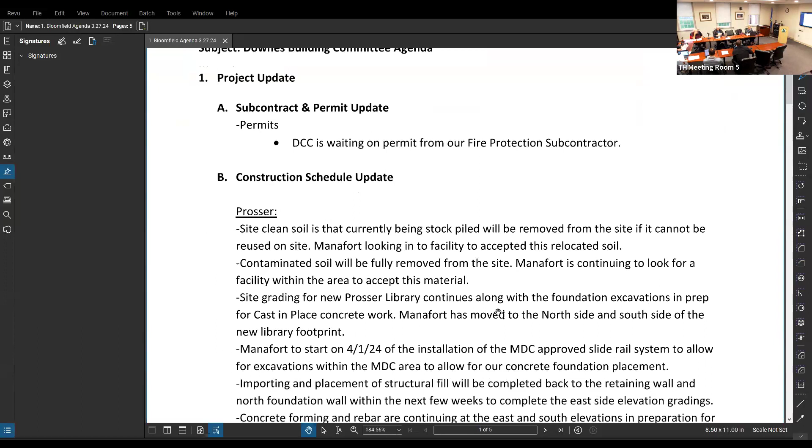Item 1B, construction schedule update. We're going to talk about the site clean soil that is currently being stockpiled. Manafort is looking into a facility to drop this off, and again, they're going to remove it from the site. Any disposal facility, knowing it's clean product, should be able to accept this.

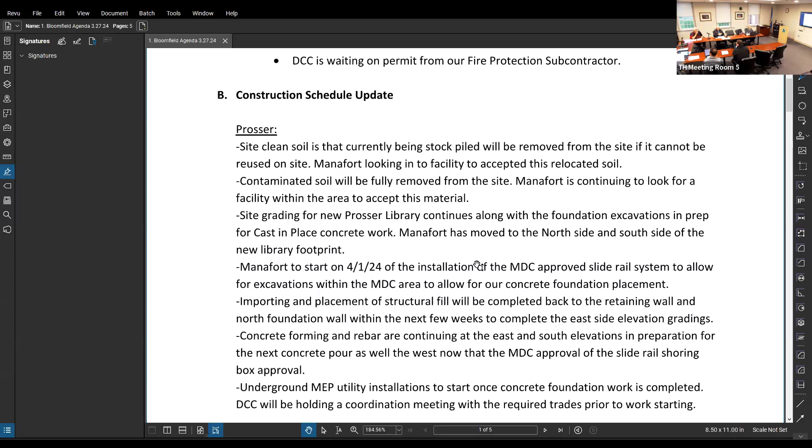The contaminated soil on the Prosser side of things is covered right now, behind the Jersey barriers. Manafort is still trying to find a disposal facility within the area to drop that off. We've requested them to reach out to Manchester landfill. Manchester takes this type of soil, but they're only allowed 2 loads a day, so you need to be scheduled, fighting for a 2-spot position with anybody else trying to bring contaminated soil in. So Manafort's working diligently to find an accepted facility to take this product.

Site grading is continuing along for the foundation excavations in preparation for the cast-in-place work. Manafort has moved to the north side and south side of the new library footprint, and they continue to excavate and provide the path for our concrete subcontractor. On a big note, Manafort is going to start work on April 1st with the installation of the MDC-approved slide rail system, which will allow us to excavate in 80-foot sections for that west side footing, which will be the edge of the new parking garage.

With that being said, Manafort's going to excavate about 80 feet within this custom trench box, and right behind that, we are going to start forming, placing rebar, and pouring concrete. Once we're done with that and the concrete settles, we'll be able to start forming rebar and placement of concrete for the wall. So in 80-foot sections, you're going to have footing and wall installed before we could finish the back end of that elevation, which would be another about 60 feet from that 80.

So it was big news from the MDC that they approved this shoring design. It allows us to work within a small encroachment of the MDC encroachment area, but it also gives them the comfort of knowing that their 24-inch RCP line buried underground will be supported, which was big news. We've been dealing with that for the past, I would say, 6 weeks.

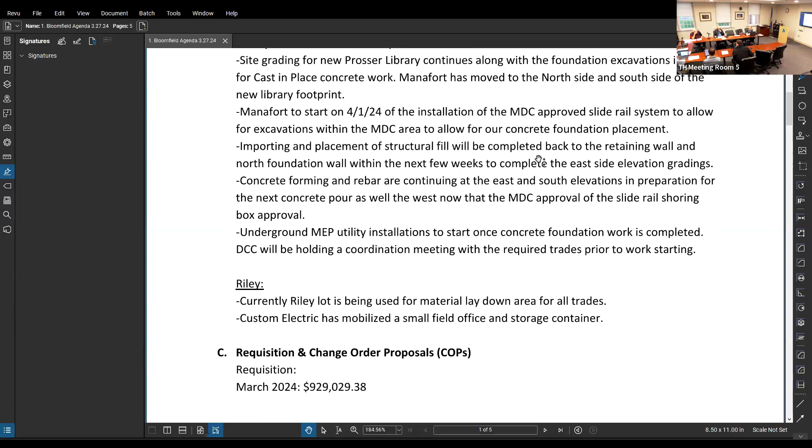So we finally took that under control, and MDC gave us a blessing to move forward, which is fantastic news. Concrete forming and rebar continuing on the east and south elevations in preparation for the next concrete pour, which will be scheduled next week. And again, that west elevation is going to start as well with Manafort in that custom trench box they're going to be providing us. Underground MEP utility installations will start once the concrete foundation work is in place.

We plan on having a coordination meeting with the responsible trade contractors to talk about the underground work that needs to happen, along with Manafort, who will own the trenching for those utilities. Currently, Riley is still being used as a material laydown area. Custom Electric has mobilized a small field office and storage container on that site.

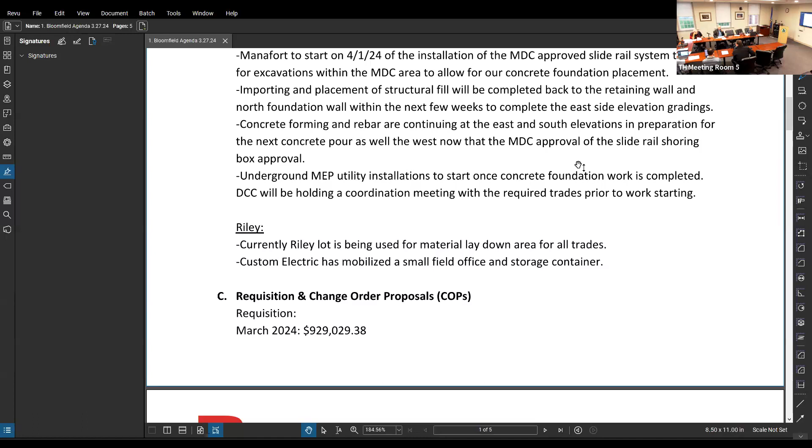Any subcontractors that are coming on or need access to that Riley side are going to be coordinated with Jason if they want to drop off a storage container, equipment, or some type of field office at that point in time. Moving on, item 1C here is the requisitions and change order proposals section, as always.

We are looking for approval for March 2024 in the amount of $929,029.38. Okay, stop and look at that. Can you put that up on the screen? The requisition? Yeah, I think I should be able to. I just have to get into my email. That's probably the best way to do it.

We have questions on the requisition while we're waiting. Wait till it's up to see if anybody else has questions. I don't know if everybody can see it. So this is application number 9, covers basically all of March. So when we submit these requisitions, we usually get our subcontractor requisitions around the 20th each month. From that point on, they are trying to forecast where they're going to be by the end of the month.

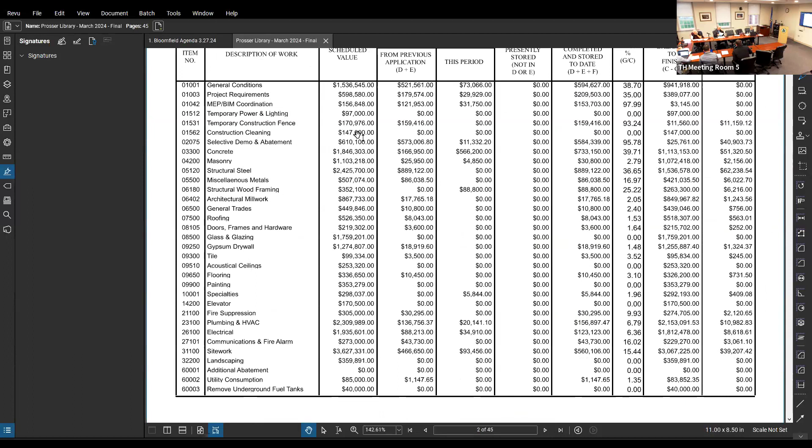So if you look here, we have all our schedule values, which is based off of our GMP, our approved contract with the town of Bloomfield. Each one of these items here in column C, you'll see a scheduled value will be revised accordingly based on approved change orders to date, which will reflect a difference from the original GMP number that was in there.

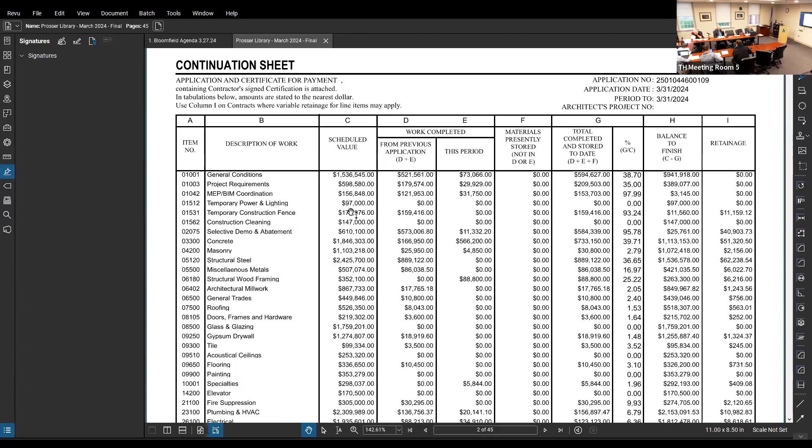And in our monthly reports, you could follow that tracking by our budget report, which is updated and current with the most recent figures. It also has approved costs for change orders as well as any pending, and it will show you a final potential sum for that line item for that subcontractor.

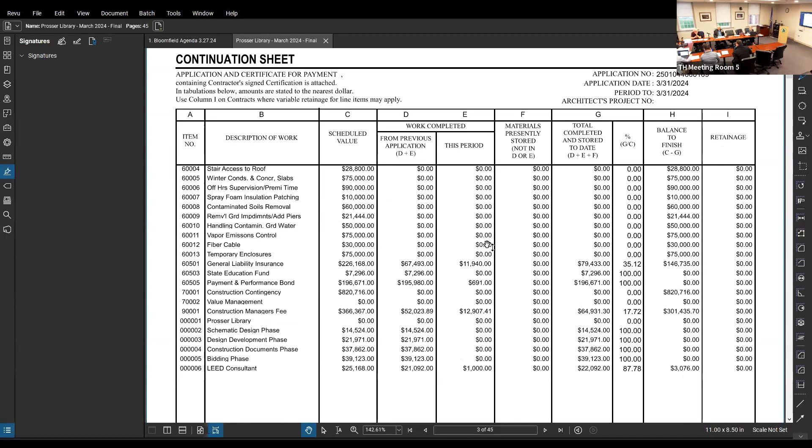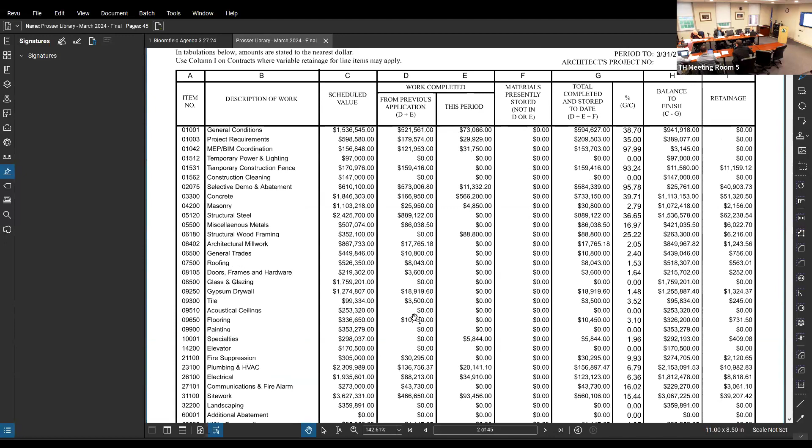All right. I know typically this has gone through the hands of our project rep, Sean, and through the architect's hands as well for approval with any questions. But despite that, I still had a question. Yeah, go ahead. Just the structural wood framing. Yep. Is now being billed up to 25%. Yes. That is for material. $34,000 was for the shop drawing process, which I remember we were requiring a breakout to try to get them moving because Epifano dropped their bid.

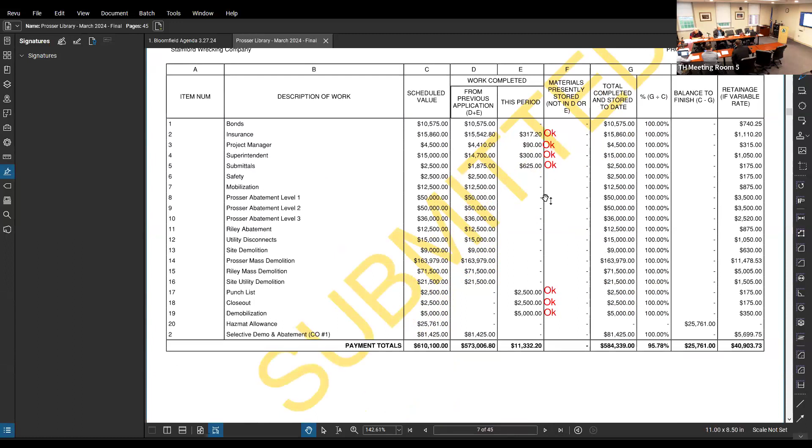So let me actually scroll down. Mark, I'll touch upon that once I hit their requisition, what they're billing. Right now, you could see all the subcontractor specific breakdowns in detail. What I usually do is go through each one line by line. If I'm okay with their billing, I'll write okay, and if not, I'll make a note. They'll revise their requisitions to what percentage I feel and Sean feels and TSKP feels they need to be. So for instance, we're scrolling down.

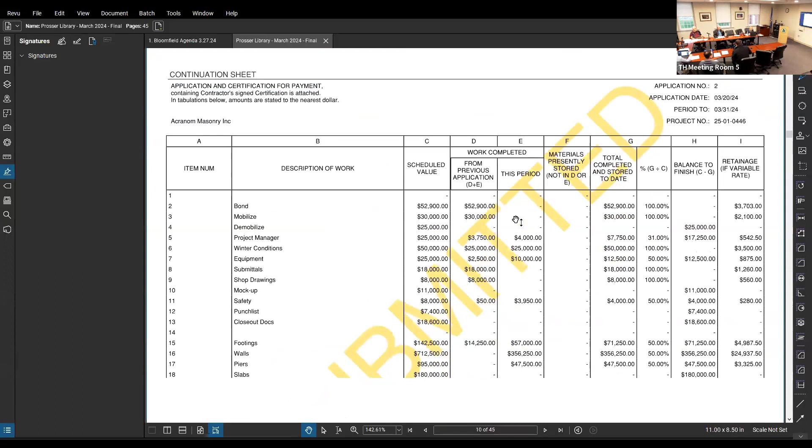Acranom is our concrete subcontractor. Originally, their first submission had their footings billed at 100%. They're not even close. They're 50%. They were billing 80% of their walls. Again, they're only 50% through. So that's some of the items that we catch and that we vet. Yeah, I know. This was the only item that I saw. So let's go down to South County Post and Beam.

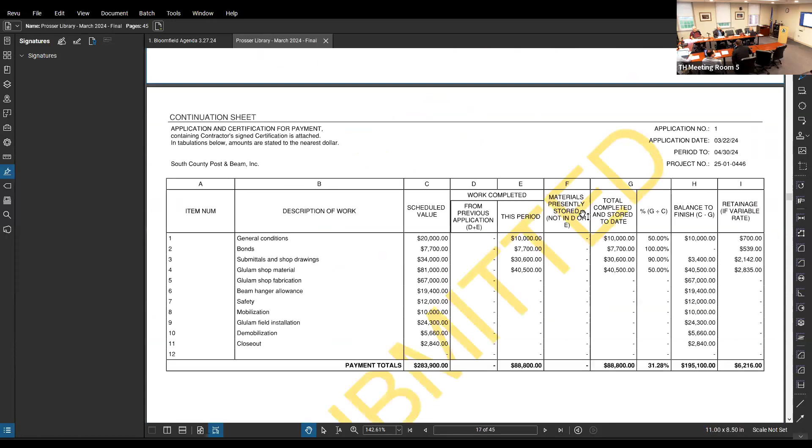So right now, their general conditions, they're billing 50%, which is all their staff time and project management time. Their bond, which we require them to submit a performance and payment bond, was broken out based on the contract. Shop drawings, the reason why they're 90% billed and not fully is because they have a 3-inch glulam piece component that they need to put shop drawings together for.

And then they have all their material in the shop that they're currently fabricating, which they're about four weeks away from bringing to the site. So we are paying for some off-site material. Correct.

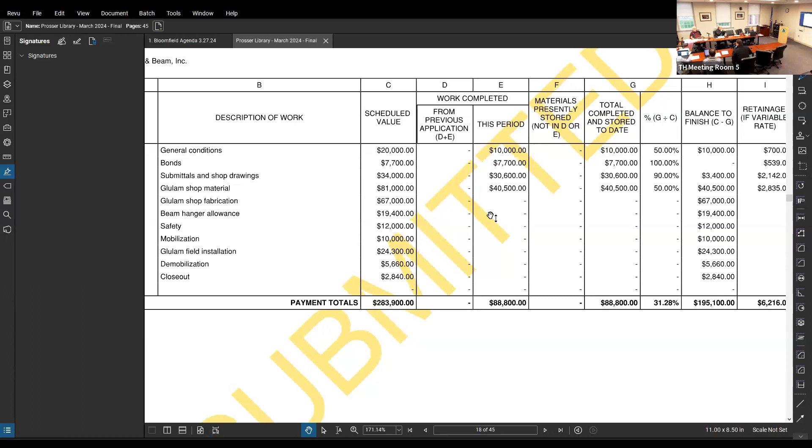You're in the microphone there. No, you're all right.

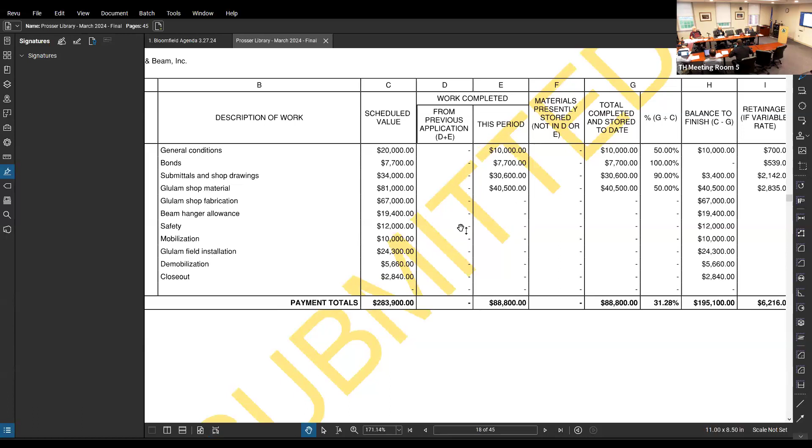You're okay with that. I want to make sure that's business as usual. Yeah, absolutely. Thank you. All right, no problem. Anybody else have any questions in regards to the requisition process? Hands up, or, I can't see everybody on the screen, but all right, so we need a motion?

Moved by Bob Berman, second by Bob Ike. Thank you very much. Any other comments, questions? Anyone there, Nancy? We're good? Okay, all in favor of approving, please say aye. Aye. Aye. Aye. That is unanimous. Thank you very much. All right, thank you, everybody.

Moving on. Budget COPs, potential change orders coming down the line here. We have COP 7B, Children's Room MEP modifications. We have been reviewing some costs that have been coming in from the subcontractors. We haven't fully put the change order proposal together yet. Right now, we are showing about a $5,000 budget credit coming back. We continue to request pricing from affected trades. The biggest component to this credit was from our electrician, who had a $13,000 credit for the changed light fixtures going to a ceiling mounted fixture due to the congestion in that space.

COP 9, structural revisions and clarifications, PR number 5, $1,979, which is currently in review with TSKP. They have some questions, comments, and concerns with that, so there's some further discussion required on this. COP 12 is the wetlands clarifications. We're still showing the $149,000 budget, but we are formally in a review to substantiate the scope of work.

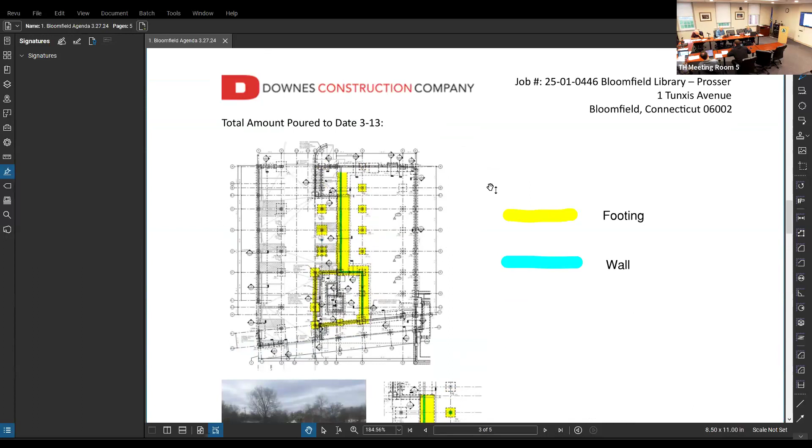Thank you, everybody. And then we'll go into the progress photo section. So the first photo here is basically a continuation from where we left off at the last committee meeting, the date of 3/13, with concrete walls and footings that were poured. As we go through this photo section, you'll see at the end where we are and where we made progress, and I could give you an update on that.

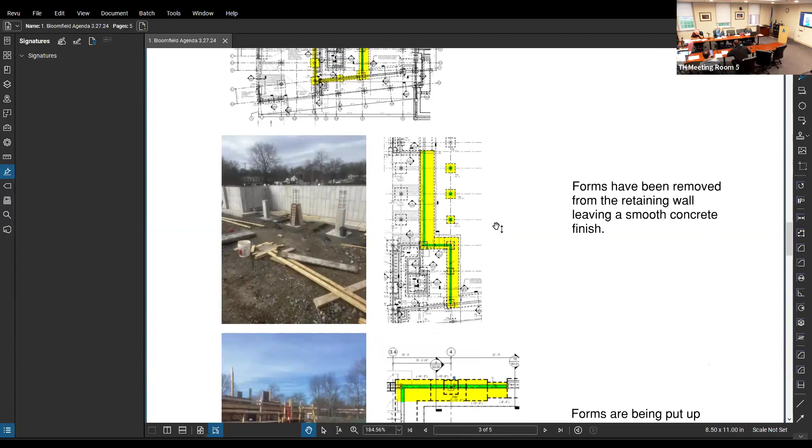So this shot right here is basically showing you that all the forms have been removed on that big retaining wall in the center portion of the building, highlighted in yellow. The next photo is looking towards the Riley lot in the northwest corner of the building. They are forming and getting ready to pour concrete. In between those forms, the rebar was inspected and installed. So we're just waiting on the concrete pour, which did happen.

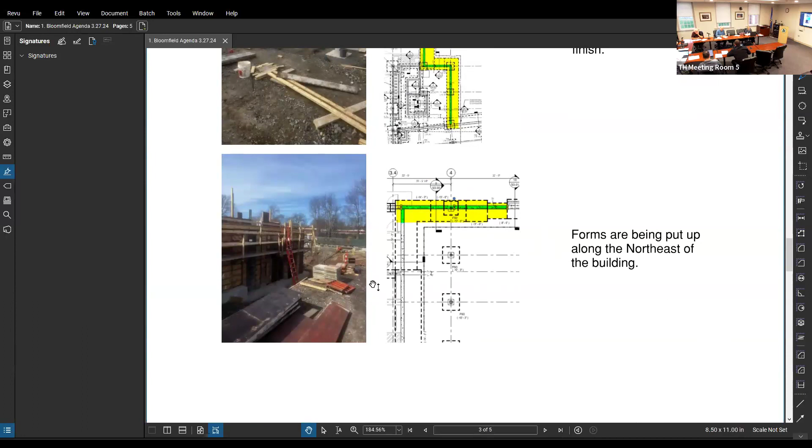As you can see here, we have that line highlighted in yellow. Anything highlighted in green or blue means the wall has been poured as well. This is the northwest. Oh, okay, yeah, northwest, my fault. That was poured yesterday. Yep, forms are coming off. If they're on site tomorrow due to the rain, they'll be out there removing those forms.

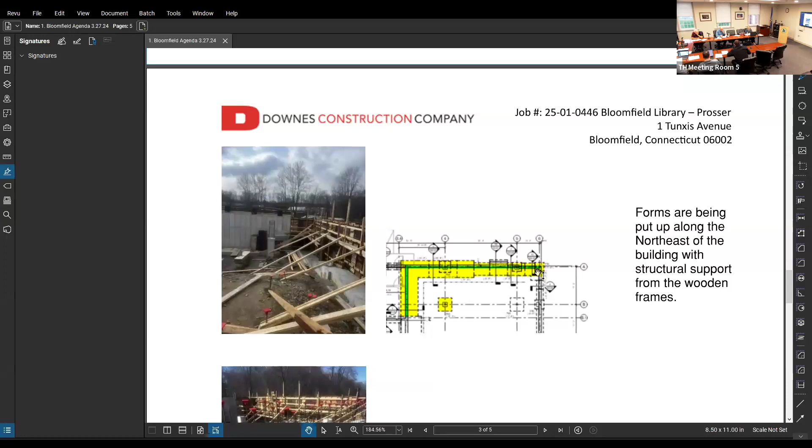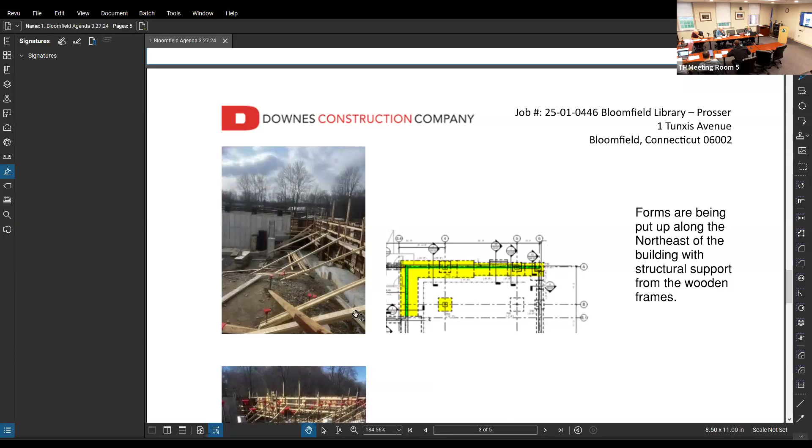All right. This is looking at the foundation wall and the step footings coming towards Tunxis Avenue on the east side. You can see the footings have been poured. The wall is formed and it was poured yesterday. This next section here is the footing coming up the east elevation, which will be the front of the library along Tunxis Avenue. We are waiting to put up forms and start the wall.

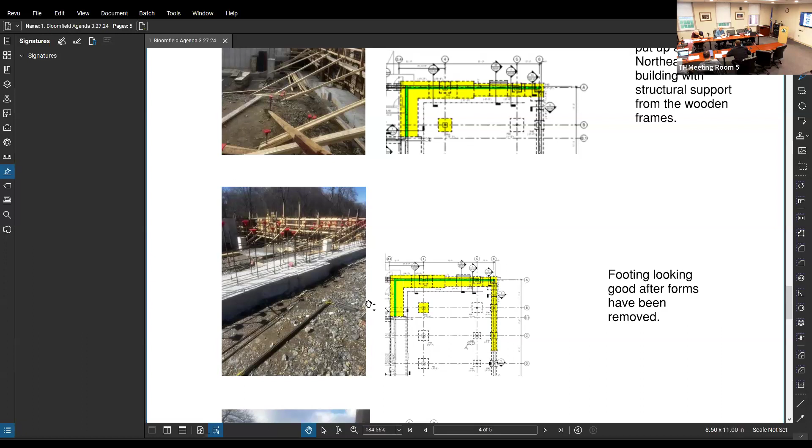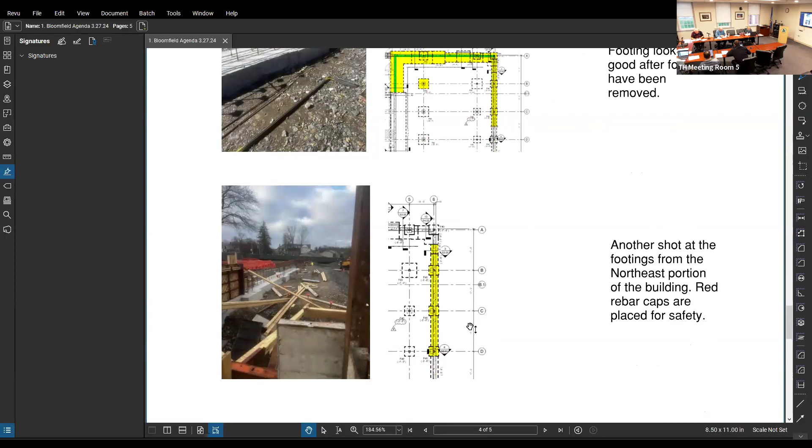Good thing about this section is the walls aren't going to be as high as that center retaining wall or the walls to the north and to the south, so concrete contractors should be able to move quickly once they get it formed up and rebar tied in. That's the same work, just a different view looking towards Mountain Avenue. That footing is going down the line there, highlighted in yellow based on our foundation drawing.

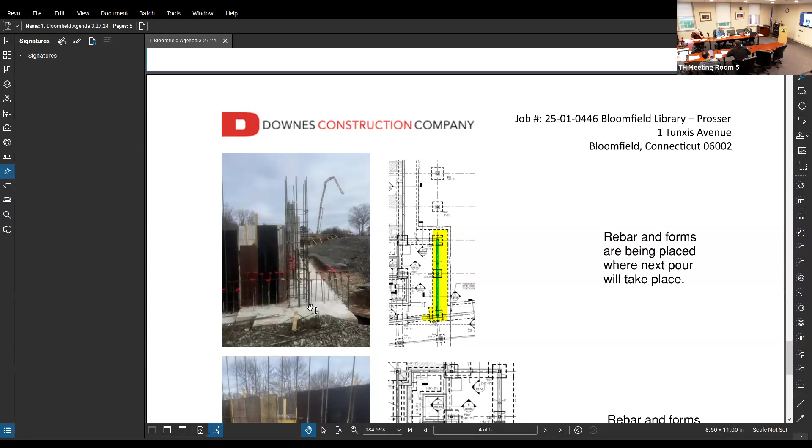This is a pier going up on the corner of the building. That's going to be by the new elevator and the stairwell in this area. We have rebar embedded into the footing. As we go up with the pier, we're going to form it and we'll pour that concrete. Usually on top of these type of piers, you'll see anchor bolts where the new structural steel column will sit going up. All right.

Forms taking place. Around to our back of this view is Mountain Avenue. This is going to be another wall that's being formed and rebar being tied in around the new elevator pit and stairwell.

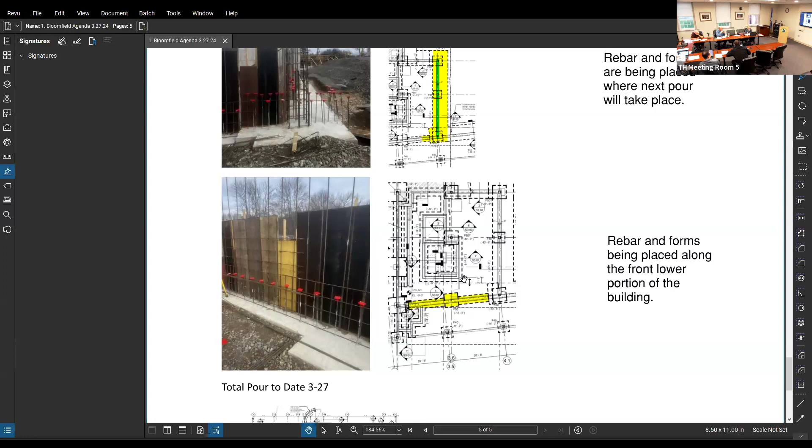All right, and now you can see the total pour to date of 3/27, where we have walls and footings all the way up to this column line up here. And this is just pours, right? So this is concrete that has been placed. But a lot of this still is formed over in this area. We have forms that have been installed. We have rebar that has been installed. Again, this highlighted item is only what's been installed as for concrete work.

Yeah, I like the overall plan, it's helpful because we can see roughly what the percentage is that's complete. This is good. Right, and that's 100% complete. That's footing and wall. Again, this is not depicting what we have for installed rebar and installed forms.

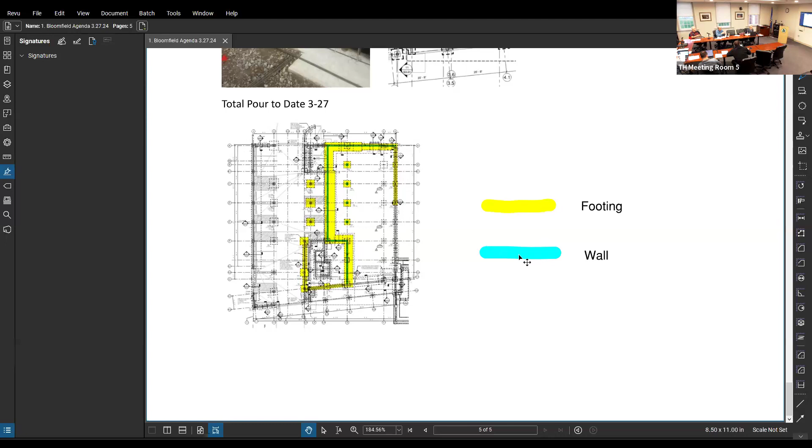All right. Anybody have any questions? Any hands up? Hands up, Nancy. Jesse? Jesse, we cannot hear you. Well, hopefully we get that fixed. Any other hands up? Okay. All right, anything else from our friends at Downs? You guys are good. We're all set. Thank you. Okay, appreciate that.

So let's move on to TSKP, and we've got Abby and Jeff and Richard. I guess I can start. Can you guys hear me? Yes, Jeff, go ahead, we can. Can you see my screen? Yes, we can. Great.

So regarding Prosser, submittal review and RFI review process is ongoing. Paying attention to Downs's hot list that John sends me, so anything that he needs that's urgent, he'll pick up the phone and call me, so it's been working quite well. Michael Horton, our structural engineer, and TSKP met today at the pre-steel installation meeting that was held with Downs. I think it was a productive meeting. A lot of things were opened up for further discussion and coordination with the trade. So that was a good meeting.

Field report 1, I issued this today. I went to the site this morning. I could show you the field report, but it's pretty much what Anthony showed you as far as the footings and stuff. Everything looks good. The rebar looked nice and tight. The job site looked fairly clean. There's a family of what looks like mallard ducks in that MDC stream that we're keeping an eye on, making sure Downs keeps things out of that stream.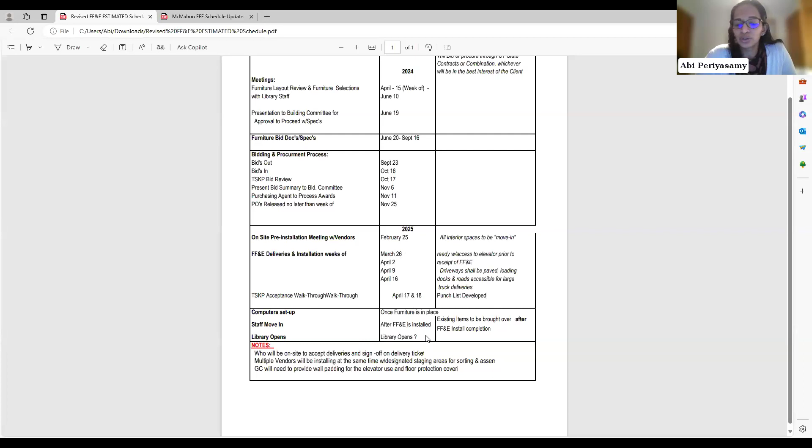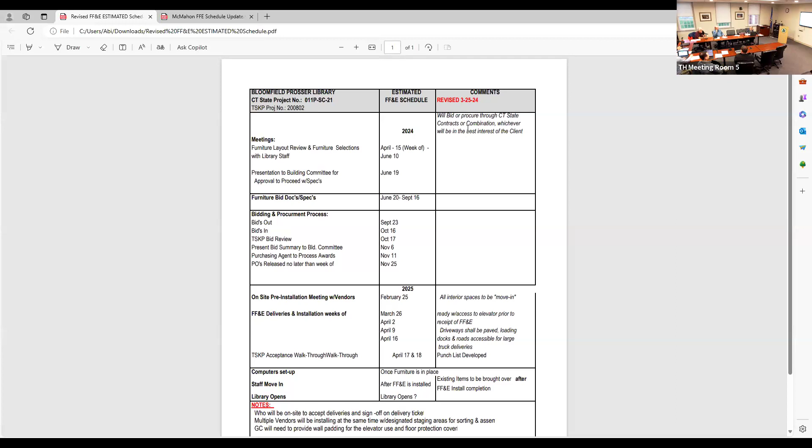Any questions? Questions for Abby? Bob Berman? Thank you, Mr. Chair. Abby, can we have a copy of that schedule? Sure. Can I email it to you later today or tomorrow? Yeah, email it to Nancy so she can distribute it to us. All right. Okay, sure. Other questions? Questions for Abby or Jeff on Prosser? Bob? Yeah, Jeff, also, what you had up on the screen, can you email that to Nancy so we can get it too?

Sure. Thank you. I can pull it up again. Should I continue with McMahon and then Abby, you jump in after me? Yes, I'm done with Prosser. Yes, thank you, Jeff. All right, let me share my screen again. All right, so can you see it? Yeah, we're good. Good. Okay, so we went through Prosser.

Now for McMahon. Scott Shaw, Glenn and I, Scott is with Downs, Glenn is with the DPW, had a meeting and I walked Scott through the scope for his estimating purposes last Friday, to clarify who's doing what. So I think we got a pretty good idea of what Scott should be estimating versus what Glenn is going to carry for McMahon. We also had a scope review with our IT consultant, Nick D'Agostino, and Chris from Bloomfield on Tuesday. And I believe some other library staff was there. I think Allison was there, and I forget who else, to clarify what the IT needs are for McMahon. Again, what Glenn is going to carry versus what's in the IT budget.

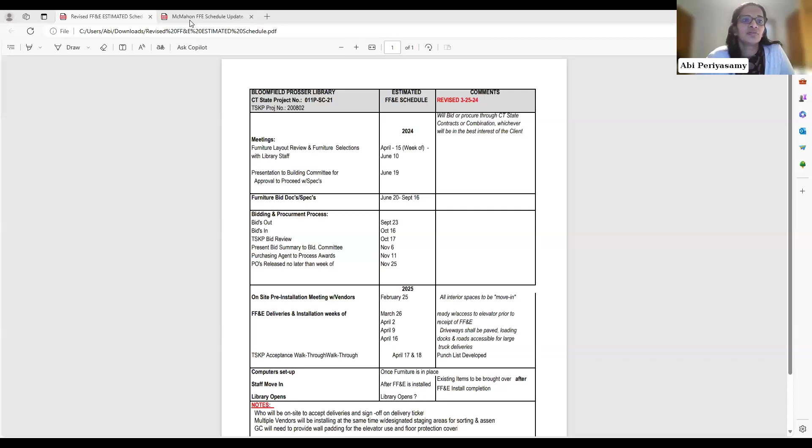This has obviously pushed our schedule by 2 weeks. I am going to share my screen to show you our revised schedule now for McMahon. So what changed, we are in March currently. We said end of March, the 27th meeting, we'll get the committee approval. That is not right, I should have scored that out, but instead we would go into April to get the budget approval on April 10th meeting. And soon after that, we will be assisting the owner with purchase orders for furniture. We used to say we could do that mid-April, but it might get pushed to either end of April, or just to be safe, I'm saying beginning of May.

What that does to the rest of the schedule is, and I'm only talking about the FF&E, I don't think there has been many changes in the construction part of the project. But based on lead times, we think it would be best if the move-in for McMahon was scheduled for late September, which would give us, especially the longest lead time item, which was library shelving, about 18 weeks, and will probably be around mid-September when all the furniture is installed. And just as I said before for Prosser, once all the furniture goes in place, then comes the technology equipment. It's always good to have a little leeway from the time all the installations are done to the time the actual opening happens. So this seems like a good time, but we can discuss if you have any questions on this schedule.

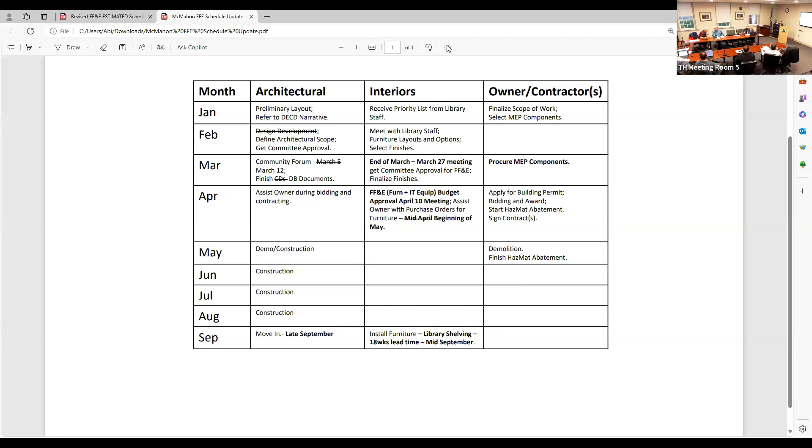Other questions for Abby or Jeff on McMahon? Any hands up, Nancy? Oh, we're back.

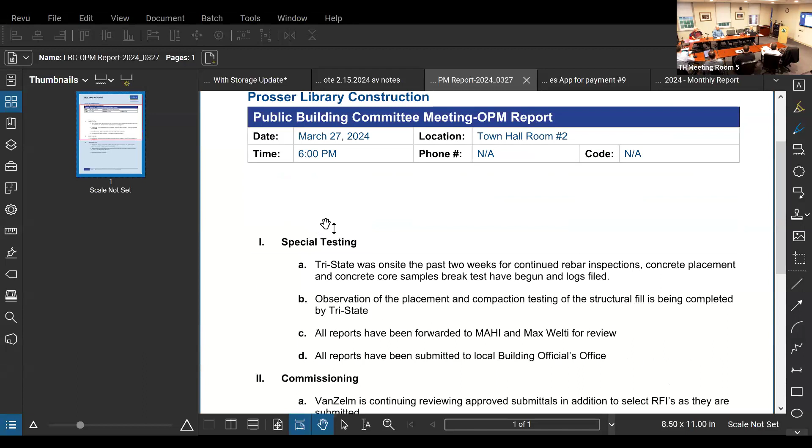Okay, well I thank you for following up on that wall liner. Seems like you made a good decision there, Abby, on that. So, anything else from TSKP? I think we're good. All right, thank you, team, on that.

So let's move to Sean, here from Colliers, our owner rep. Thank you, Mr. Chairman. My report is pretty much the same as two weeks ago.

Ongoing testing from Tri-State on all the concrete that's being placed. They're there to inspect the rebar and inspect the concrete placement. They have begun the core sample breaks. The samples taken sit in the lab for extended periods, and at 7 days they do breaks to test the strength of the concrete. Those reports are forwarded on to Michael Horton Associates for review, and also submitted to the building officials.

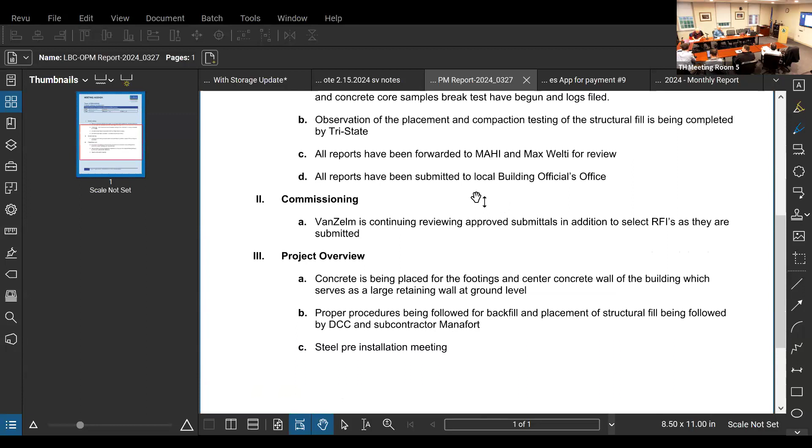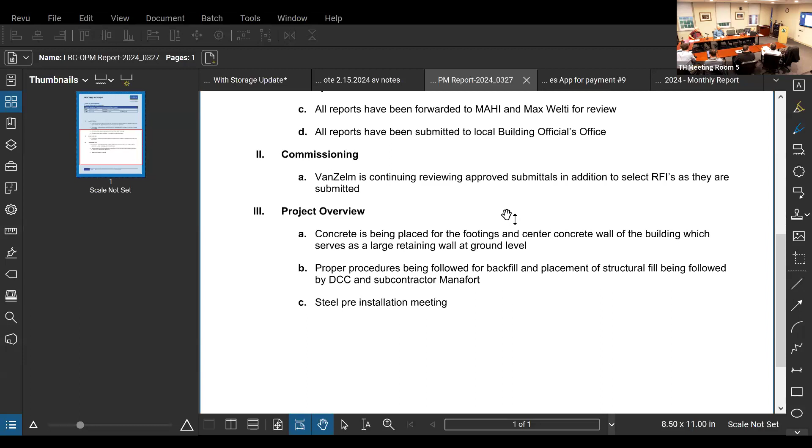In terms of commissioning for the project, that's the ongoing effort of reviewing submittals as they're approved and any RFIs that pertain to the mechanical systems. In terms of the project overview, much the same as both Anthony and Jeff displayed. Everything is going along, and all the proper procedures appear to be being followed.

I did sit in on the steel pre-installation meeting that Downs organized today, and it was a group effort. The design team was there, paying a lot of attention to the details. Kudos for those. Again, I echo what Jeff said, very productive meeting. A lot of things were addressed.

Also a very productive meeting the previous week, that MDC issue that Downs mentioned, they came to resolution on. There was a lot of effort on that, including Mark, who was there leading the charge, a lot of design team people making sure that effort happened smoothly so it didn't delay the project, and it could have potentially cost a lot more money than may be incurred. But that's all I have if there's any questions.

And as part of your move management duties, you are working on McMahon, correct? Correct. Yes, so I will start getting in the mix with Abby once those documents are finalized and prepared, and we'll get in the mix in terms of that furniture. Also, I've been collecting the information for additional storage or moving out of the atrium space. That's all being reviewed by Mark and Nancy.

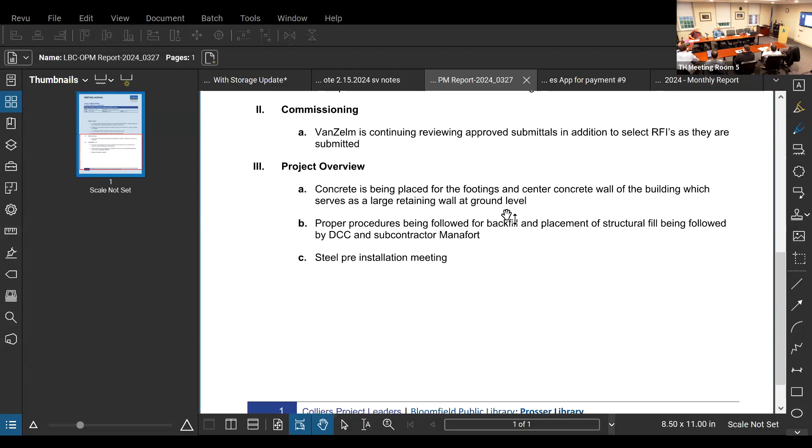Questions for Sean? Can you unshare your screen and then see people? Questions for Sean? Okay, Sean, thank you.

And Nancy, we have invoices, correct? We've done them. That was it. Okay, appreciate that. Other items from committee?

Bob? Thank you, Mr. Chairman. I just want to thank Downes for the detail they're giving us on all of this as well. TSKP also for making sure that things stay in line as well. And Sean, thank you very much for staying on top of it.

Other committee members, any items? Don't see any hands. Okay.

All right, good. Future meetings. April 10th is our next regular meeting, and we will have a presentation update from our LEED consultant. Please make sure you make that. I think it'll be some really interesting things. We can bring her in anytime we like, but we put it off until there were some substantial things to talk about with LEED. We do hear from her every other week at the owners' meetings in the trailer, so she'll be sharing all that with the building committee at our next meeting.